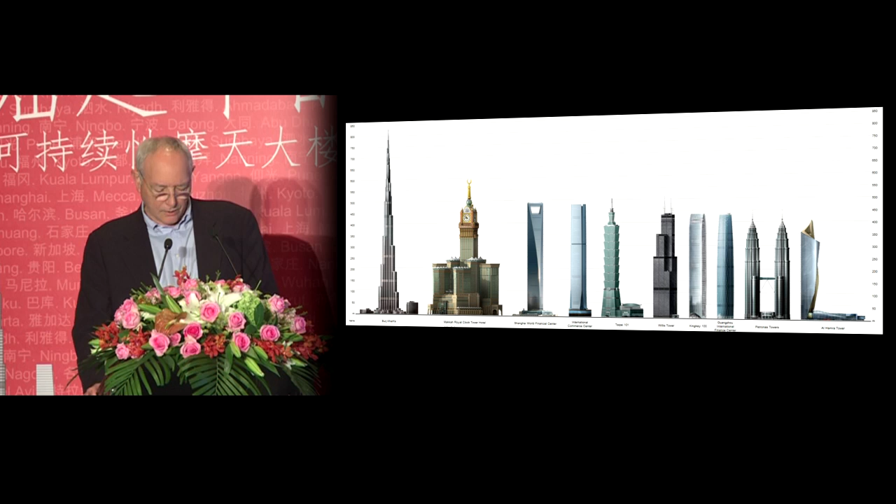The architecture of super high-rise towers, however, is challenging. In some ways, it's an expression of the latest technology, but it also has symbolic overtones which relate to cultural aspirations. Examples such as the Jinmao Tower that we're in now and the Petronas Towers in Kuala Lumpur have used symbolic gestures to help them relate to the local context.

I'm not saying that's wrong, but there is an argument suggesting that high-rise towers should relate more to an international context. Their form would be technologically based, more like a car or an airplane, which have a functional aesthetic without the need for embellishment. An aerodynamic shape being more efficient in terms of the size and weight of structure required to deal with the loads and horizontal wind forces.

This theory is borne out by history, which reveals that whilst in Chicago and New York, towers used new framing concepts for the structure but retained highly decorative traditional heavy masonry cladding. The architecture of later towers changed considerably with the introduction of modern curtain walling, which offers more lightness, efficiency, and a new aesthetic was created.

Cladding systems are continuing to evolve and offer new possibilities for the design of towers. The decision on the amount of complexity or simplicity is down to architectural preference. The architect puts forward his ideas, which are either accepted or rejected. Our design for the Guangzhou International Finance Centre, seen here, makes a case for an aesthetic that aims for an elegant simplicity, but expresses the function, structure, and components of construction in a clear and direct way.

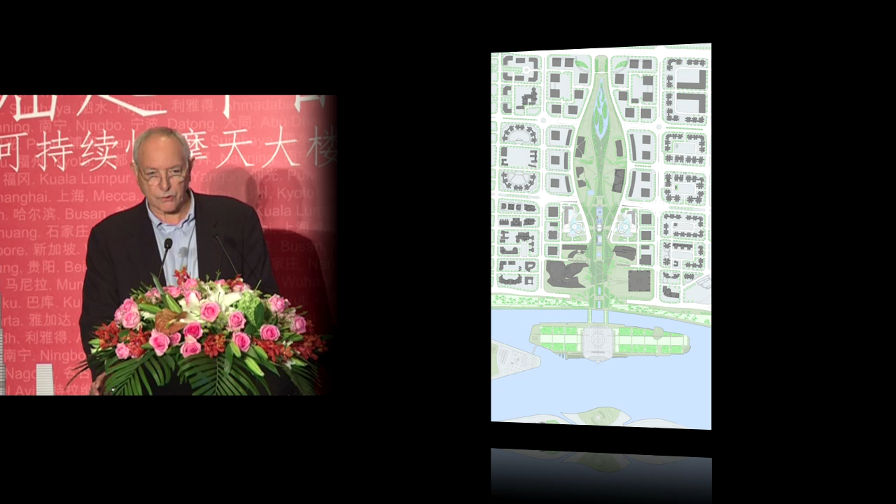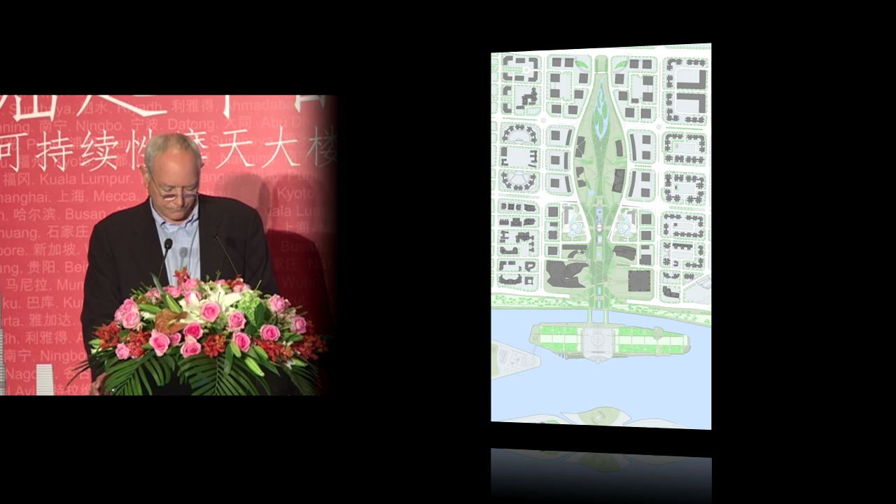The project was won in an international competition held by the city planners in 2004 for a mixed-use development of approximately 450,000 square meters to include a tower of 235,000 square meters on the Zhujiang New Town site in Guangzhou. This was part of a strategic master plan to consolidate a new civic and financial center around a grand central park developed for the Asian Games of 2010.

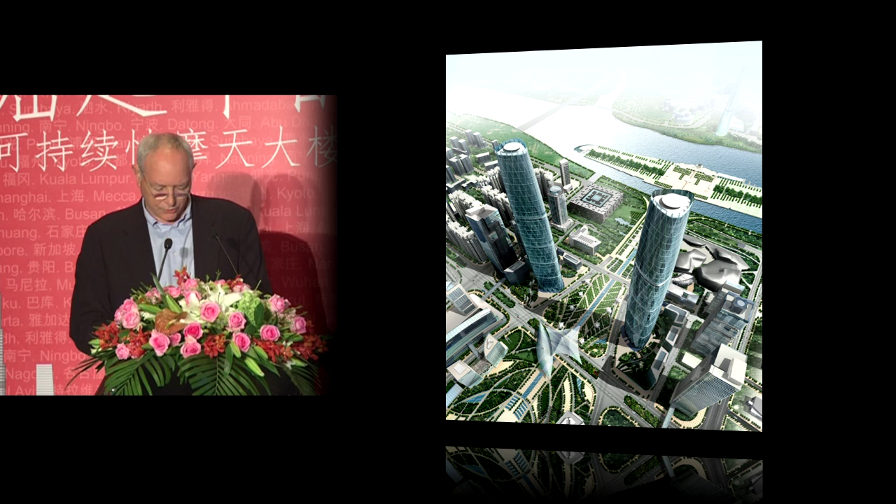This was our competition-winning scheme for twin towers. In fact, they proceeded only with one, and the second one will follow. And WilkinsonEyre were appointed by the Yuexiu Property Group as architects for the development in a joint venture with Arup Hong Kong, as engineers, and the South China University Design Institute. The project started on site in December 2005.

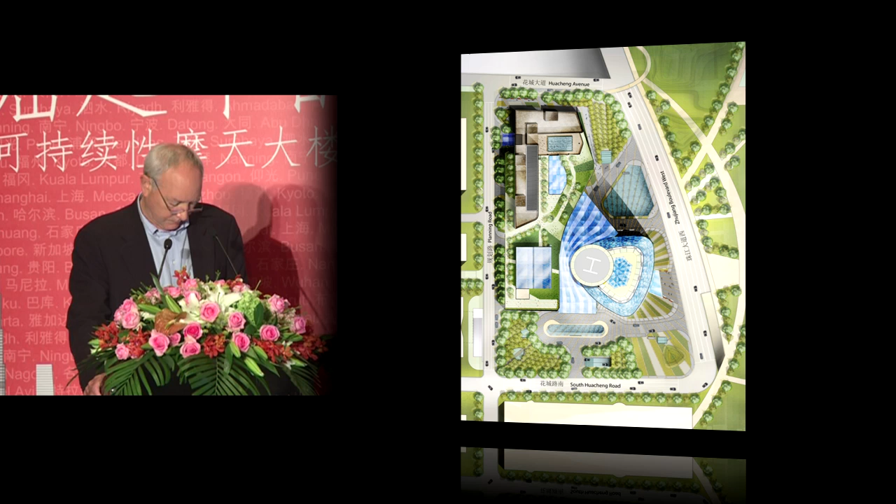On a site of 31,000 square meters, the development includes a retail mall, conference center, and serviced apartments in a podium, together with a tower containing offices and hotel. The tower, which has 103 floors, reaches a height of 437.5 meters, making it the fourth tallest building in China and the ninth tallest in the world at the time of completion. Now, of course, it's way down the list.

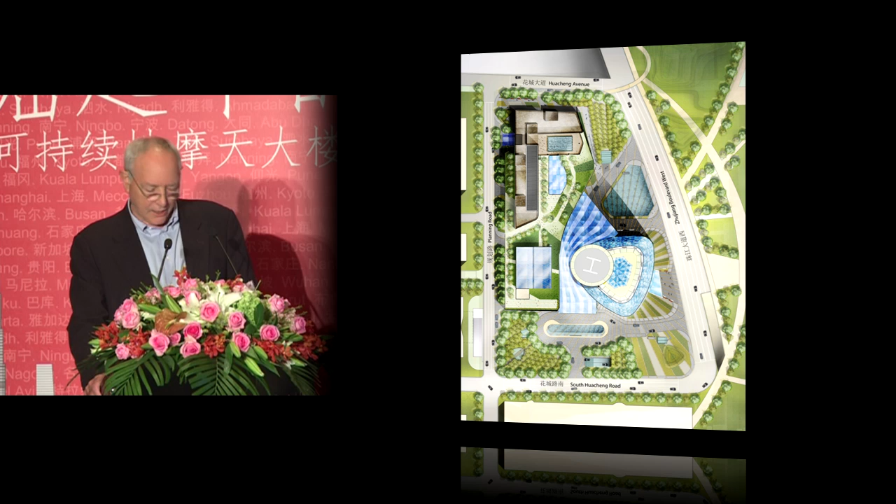The upper 33 stories are occupied by the Four Seasons Hotel, which has a full-height central atrium rising from the reception lobby on the 70th floor, a height of 115 meters, which is tall enough to accommodate the dome of St. Paul's Cathedral in London. The lower 69 floors of accommodation, a net 167,000 square meters, are of multi-let office space around a central core. In concept, it's much the same as this building we're in, which set the trend.

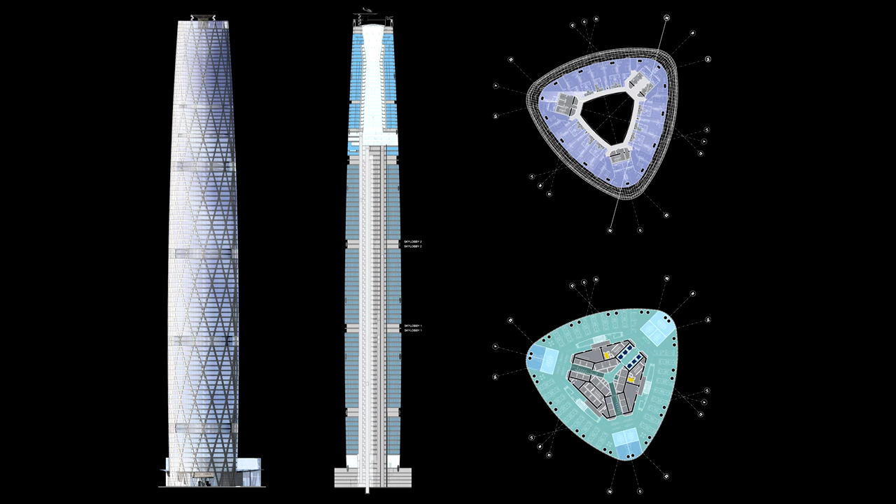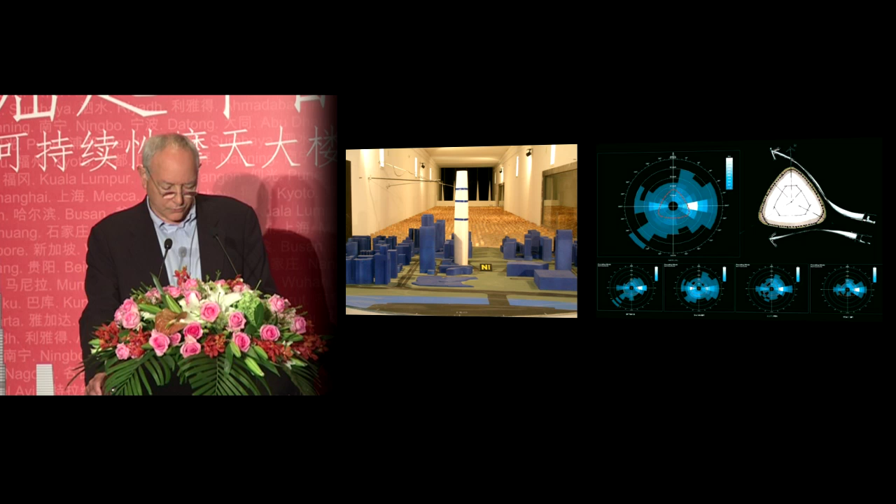The plan, which is a curved trochoid, was developed to deal efficiently with external wind forces, as well as providing a flexible arrangement for incremental letting. In wind tunnel tests, this shape was found to be extremely efficient in shedding wind load. In section, the external walls curve out from the ground floor to a maximum girth at approximately 1/3 of the height, then taper gently to the top, where they merge with the sky.

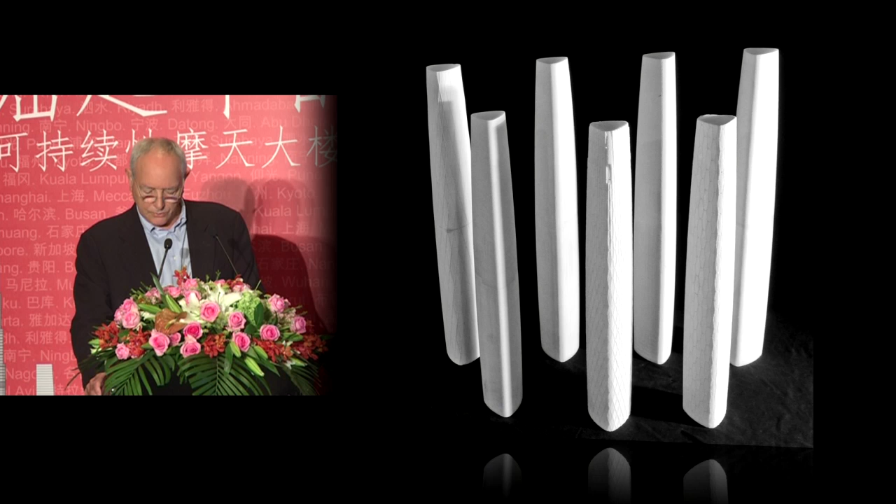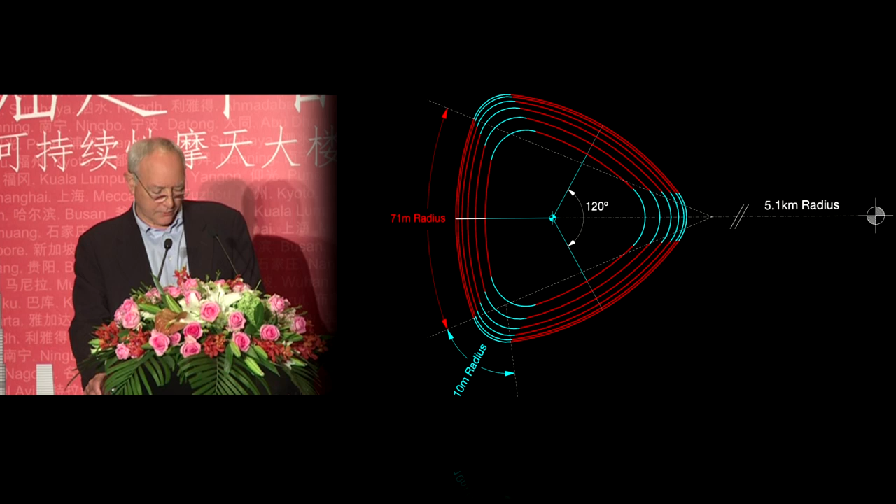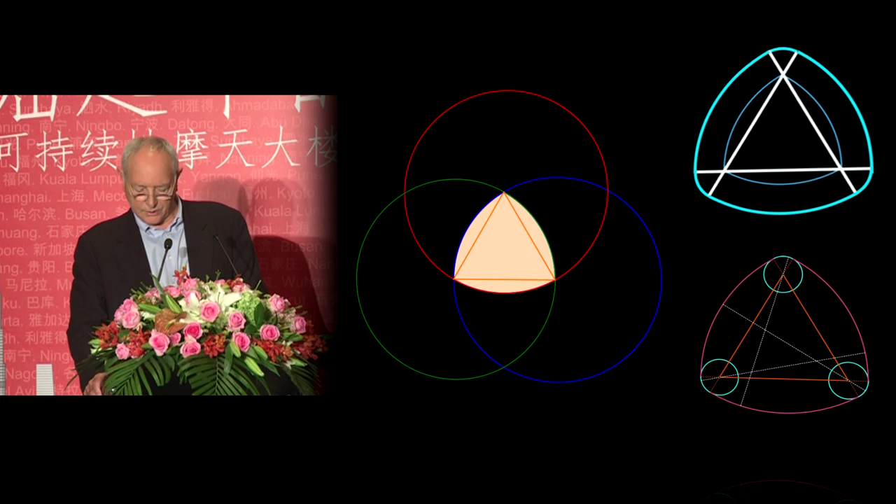The resultant form, which was determined by 3D computer modeling and rapid prototyping, these are just some of the prototypes we made, looks deceptively simple, but is based on a complex toroidal geometry, with each of the three facades set out on a radius of 5.1 kilometers vertically, and with a radius of 71 meters in plan and 10 meters on the corners. I love geometry, and I love exploring the potential that you can with computer 3D modeling. It's a huge opportunity to explore new space.

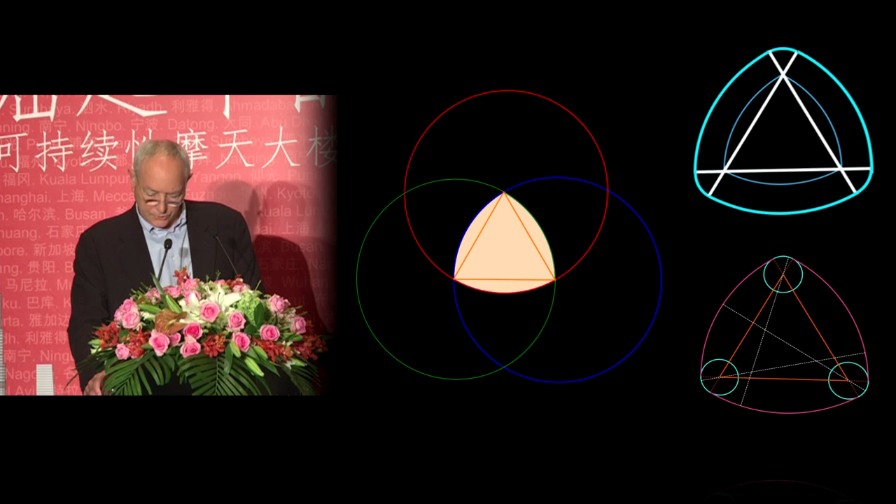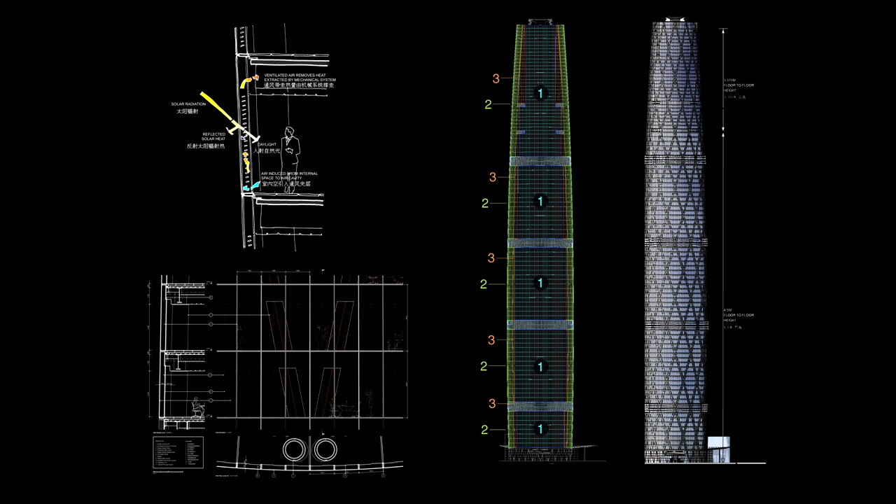The building's shape is emphasized by the smooth glass cladding, which is made up from 1.5 meter wide repetitive floor-to-floor height glass panels, which are narrower on the tighter radius corners. A considerable amount of time was put into achieving standardization in order to keep the costs down. With a surface area of 80,000 square meters, it would be prohibitively expensive to incorporate too many special sizes. And we achieved 90% repetition from 4 standard panel sizes.

The cladding was designed initially as a ventilated double skin with interstitial louvers for energy efficiency, but unfortunately this was omitted during construction for cost reasons. So a new unitary system of high-performance glass was selected in its place, and care was taken to ensure that sufficient transparency was achieved to allow the structural diagrid to be seen clearly through it.

Another distinguishing feature on the otherwise plain curved curtain walling system is the double floor horizontal bands of the refuge and intermediate plant floors, which have a different glazing module with a hit and miss arrangement to allow ventilation.

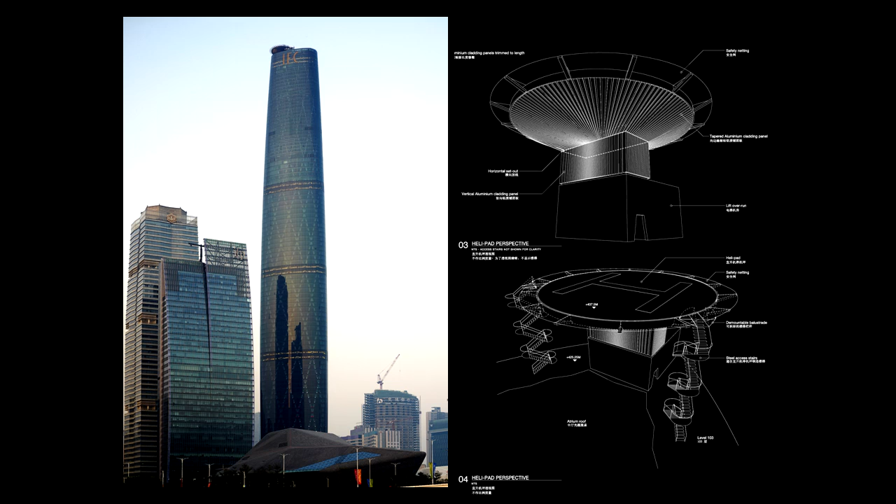At the very top, the glazing continues beyond the uppermost floors, which hopefully gives the appearance of the walls fading into the sky, and there's no spire or projecting mast because of the helicopter landing pad, which was requested by the fire officer as part of the evacuation strategy. Being a surprisingly unusual addition to a super high-rise tower, the helicopter landing pad has been designed as a sculptural element that overhangs the top of the glazing.

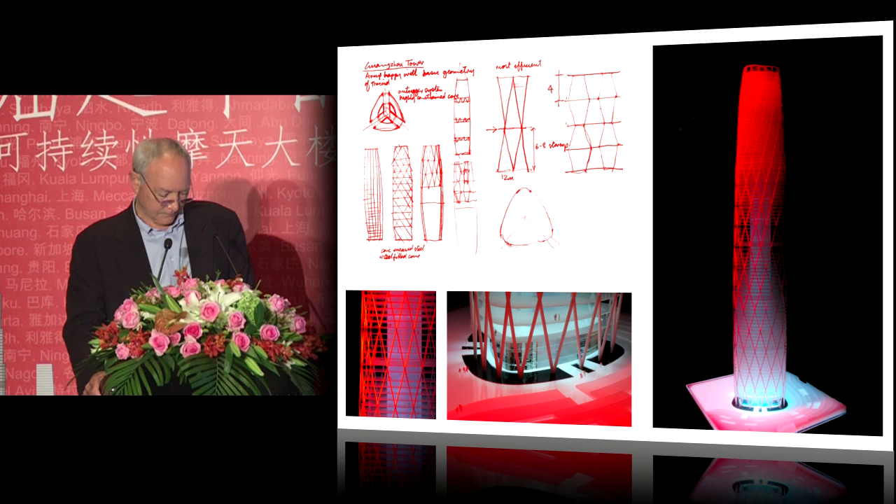Now, I'd like to talk a little bit about the diagrid structure. It provides a strong visual contrast to the smooth glass curved form, and structurally it acts as an exoskeletal frame, which provides the rigidity to withstand the horizontal wind forces in place of the more normal heavy outrigger column structures. This was conceived in close collaboration with Arup, who were always looking for innovative and efficient solutions.

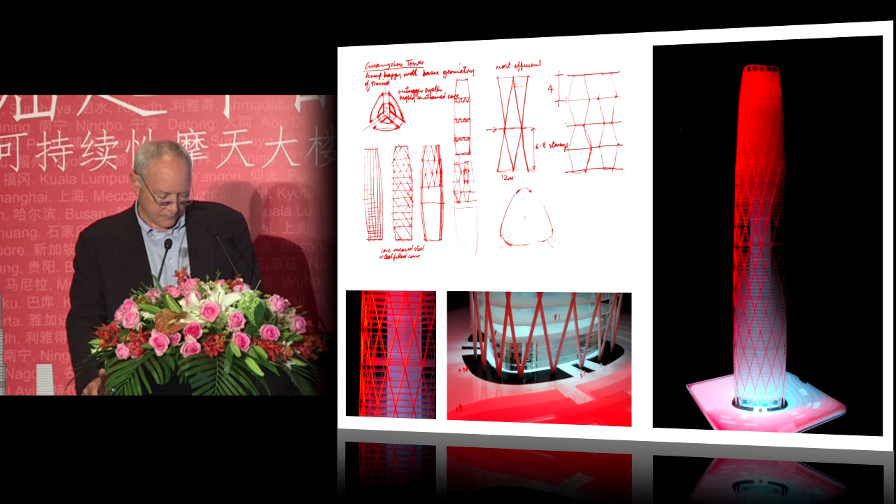The Guangzhou IFC is the tallest building where this form of structure has been used, and the major benefits it offers are rigidity and flexibility of layout. There's been no need for dampers to reduce horizontal movement, and it's been possible to accommodate a large atrium without any major additional bracing structure. The diagrid, combined with a central core, provides gravity and lateral resistance. It's also a good arrangement for seismic design.

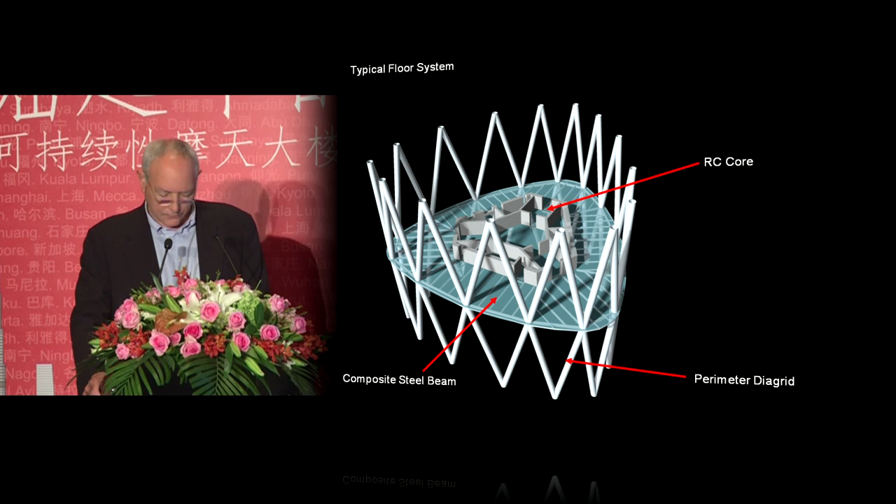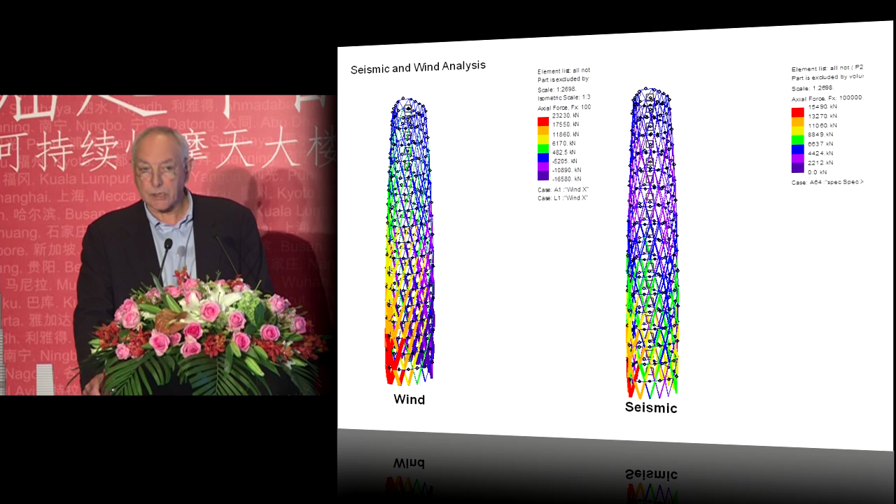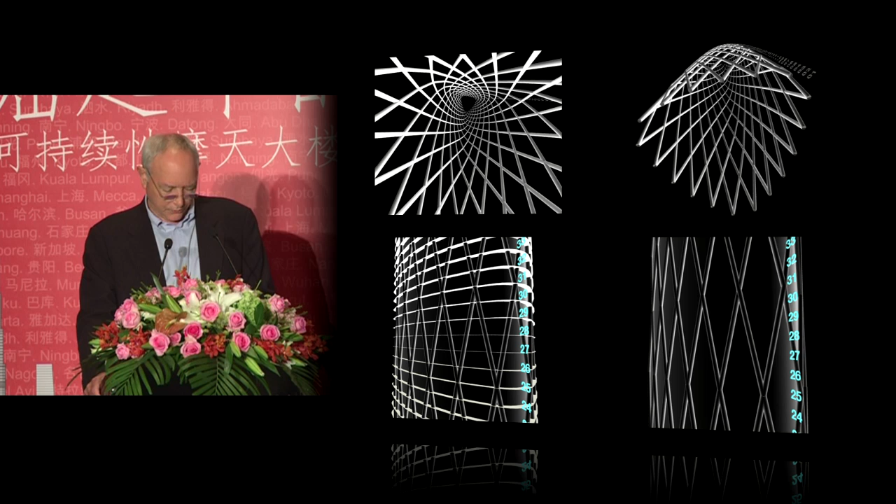The diagrid system behaves as an external tube which is fully braced, so that most of the forces are transferred by axial force, which makes it more efficient than a moment-type frame. The geometry was developed for efficiency and visual appearance, which has resulted in a giant order of diamonds 54 meters tall, spanning between 12 office floors and 16 hotel floors.

For efficiency and ease of construction, the frame is a composite structure of concrete-filled steel tubes. The joints extend between 2 floors and node out on the horizontal floor structure. Tube sizes vary from 2 meters diameter at the lower floors to 1.1 meters diameter at the upper floors. They look huge close up, but quite modest within the overall scale of the building.

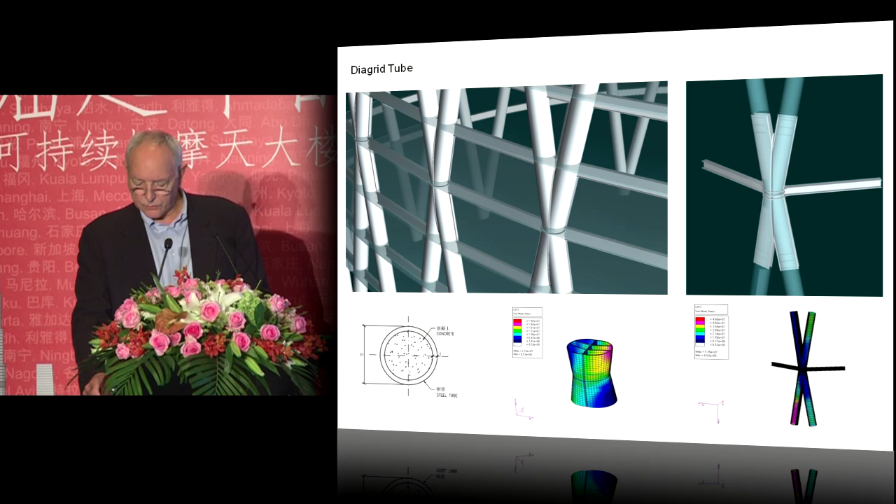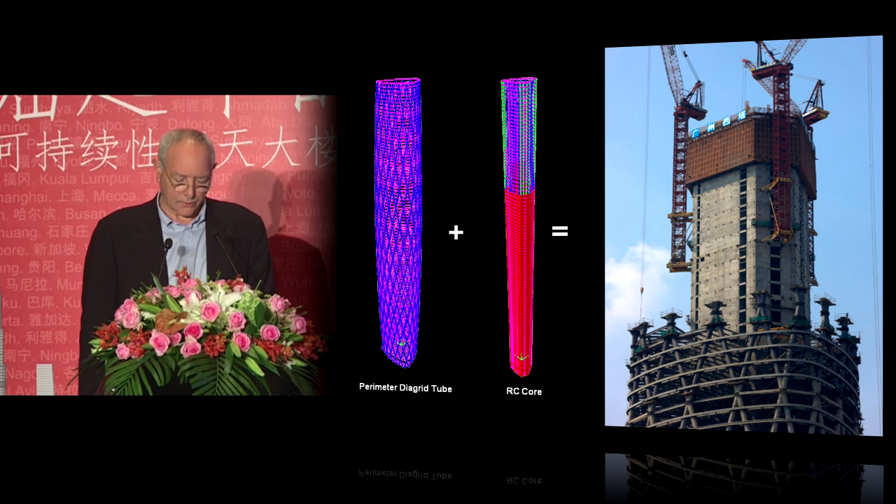The central core, which served the offices, was constructed in reinforced concrete with a climb form system. Its shape was determined by the lift configuration and the briefing requirement to provide flexible access for multiple letting of the office space. Altogether, there are 71 lifts in the building, of which 52 serve the office floors, 15 serve the hotel, and 4 for the car park.

A central triangular core arrangement contains 9 double-decker high-speed lifts, which serve the key refuge floors from which local lifts connect to the intermediate floors. This system provides fast and convenient access from the ground floor reception to the individual office floors. 2 stairs provide means of escape, and these are lobbied at each refuge floor. Toilets for each floor are designed to make use of the vacant spaces between local lift shafts where they tail off, and adequate space has been provided for the vertical services risers.

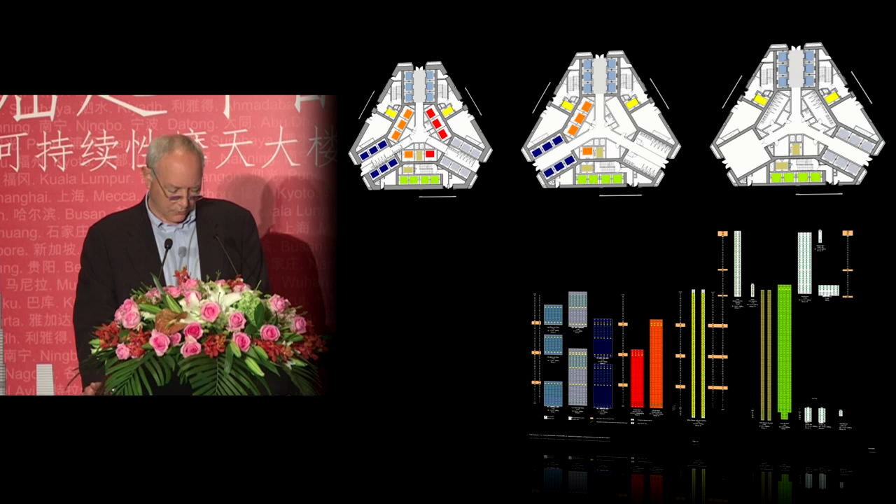Through careful planning of the core, an average net to gross ratio of 70% has been achieved for the office floors and 68.9% overall. Flexibility is important, and the plan shape works well as a single office let, or alternatively, it divides easily into 3 distinct areas, each with its own access to the core. There is a potential for open plan layout or for subdivision into cellular spaces.

And although we were not appointed for the interior design, I'd like to show some recent photographs of the internal spaces, starting with the ground floor office lobby. And then this is the hotel reception on the 70th floor. You can get an idea of the scale of this structure, which is all visible. But I don't mind that.

When the hotel operator first looked at it, he said, "It's great, but can you get rid of the columns?" We said, "Unfortunately, you couldn't. You have to make a feature of it." But in a way, I think they're very happy with them because it's very distinctive, and it's very different from the huge mega columns, which would be the alternative.

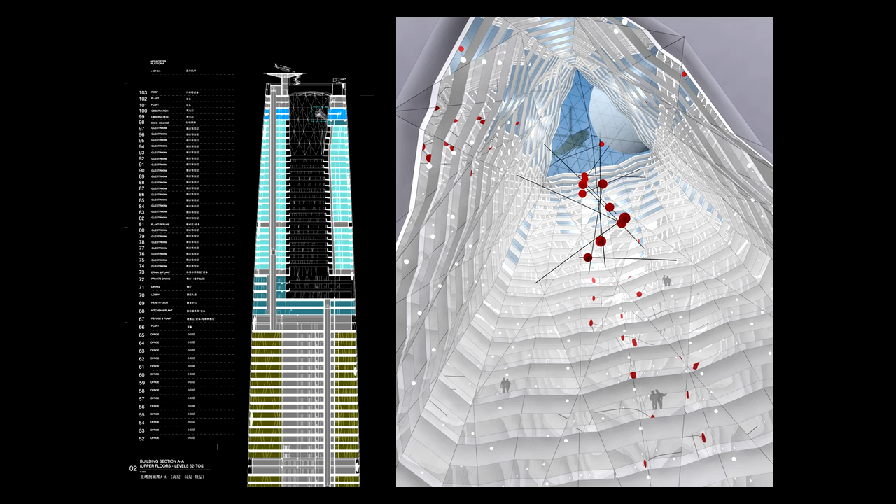Looking at the atrium, this was our first concept design, where we were trying to achieve a quality of light, a crystalline sort of form to it. Because 34 stories is quite tall, and I've noticed in a lot of hotels, the atrium spaces are quite dark and dingy. So that was what we tried to achieve. This is what has been achieved.

This is a nighttime photograph, and you can begin to see that by faceting the balustrading, we have managed to achieve a little bit of that crystalline nature that we were hoping to. And on the upper 8 floors, where we had to provide a smoke screen, we faceted the glass to create this kaleidoscopic effect with the crystalline form. So we got somewhere near to what we were trying to achieve.

This is a corridor to the typical hotel floor at the upper level. And this is in the lobby area. Again, as I said, we weren't involved in the design of the interiors, although we were consulted. And it's very much over to the hotel to decide what the appearance of the spaces will be like.

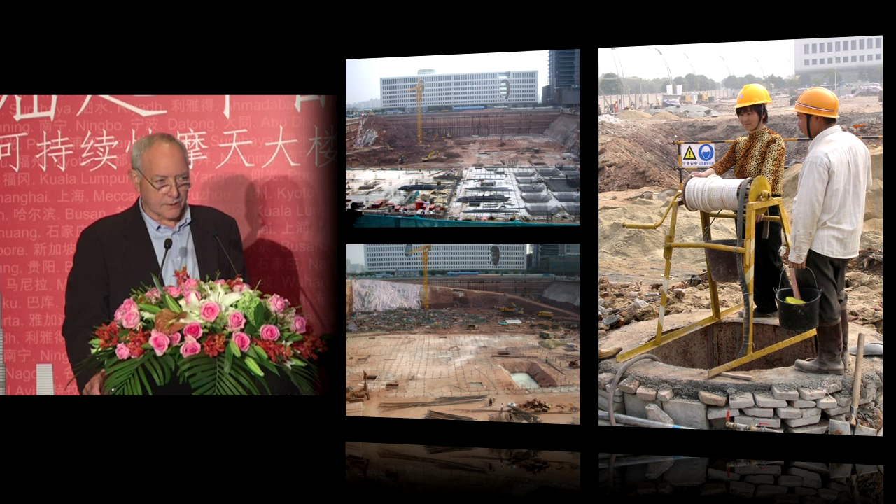Now, as an architect, I'm very much a hands-on person, but when it gets to these major projects, it's very difficult to keep any sort of control, particularly for a project in China, away from our main office. But I watched with great joy and pleasure how the construction was achieved. It started in December 2005, only 5 months after we were appointed.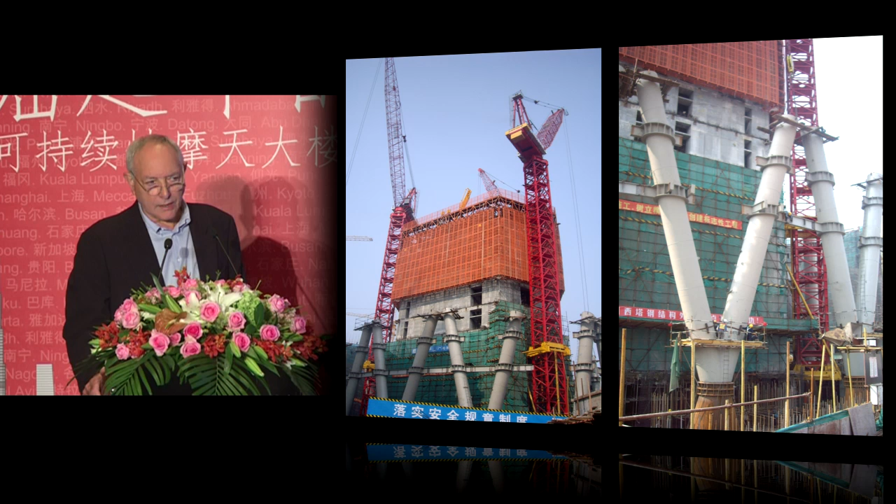And all the elements were prefabricated in large sections, so it was fairly easy to construct. So this is one of the node points, which actually is the height of 2 floors, so it's over 8 meters high. You get an idea of the scale of it. But once it's in place, it doesn't look so large. And then you get this photograph, which I really like, on the right-hand side, which is very much like those early skyscrapers in New York and Chicago. And it's very exciting to see how they managed to work at these heights and scale.